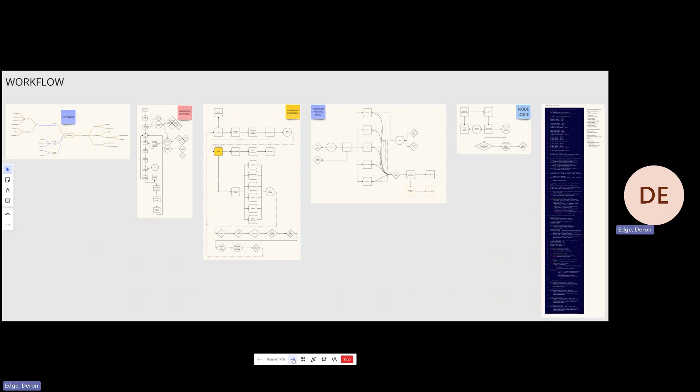So let's go to the first frame. So we've talked about this before. I won't go into it too deeply, but the software is basically a mix of Autodesk products between Revit, Forma, and Dynamo, TestFit, and then there's future options for future software, for example, Arcol or Schema. Both do very similar functions to TestFit, but the main thing about all these is they have the ability to tie into Autodesk and each of these other components. So it makes a comprehensive design solution.

Now, this first workflow is basically just kind of an idea to iterate through the process, right? So for example, you would start with Forma, develop a site plan, specify a parcel that you are going to define the site on. And whenever you know that parcel, you can start doing things like code analysis, or you can run initial site analysis, things like a wind study, building density studies, pedestrian flow studies, noise studies, things along those lines. And that all feeds back into the parcel.

From here, you can export out to Revit, at which point we come into the Dynamo portion of it. So what this will end up doing is exporting out various geometries, lines, for the most part on this first run, that we can start running the script.

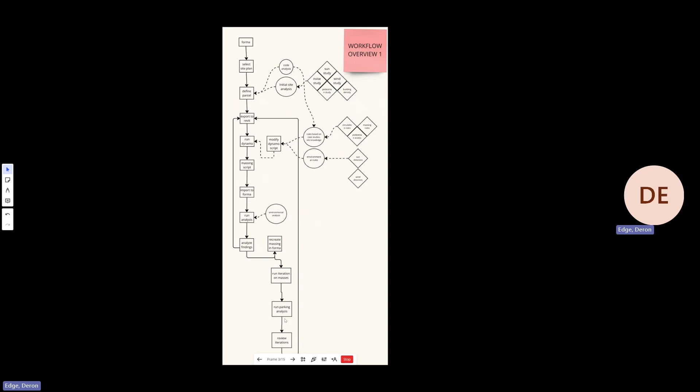Or if there's more adjustments that need to be made, we circle back to Revit. It goes back out as the export, and then we run through the process again and keep refining it in this loop until we get to a solution that we're happy with. This is kind of the workflow of overview one.

The next workflow is very similar. In this case, we're also starting with Forma. So we'll do a site creation, same thing, parcel selection. We'll specify the link to Revit. And then up here at Revit, we'll go back to the Dynamo script. In this case, we're doing something a little bit different.

Inside Revit, there's a generative design command where essentially instead of, in the original one, running one script at a time, this will run that singular script or a multitude of scripts multiple times, kicking back a variety of results, and it'll develop basically a report or feedback that'll let us know, based off of the matrix or the parameters that you're interested in, these are the most efficient ones based off of your design.

At that point, whenever we go through that process and streamline through that, we can go back out to Revit, select the design we're going to go with, and then go back into Forma. Once we're in Forma, we can jump into the analysis of the masses. In this case, the same thing as before. There's the parking stuff, the environmental, the sun analysis, wind, sound. We can start looking at the carbon footprint. And we just keep going back through this process.

But the difference here is this generative design option, which allows us to do more design options up front than the previous overview of the workflow. From here, we'll select the design, and then the same thing goes back into TestFit. The problem here is we'll have to manually build all the masses that we've been developing in TestFit. There's no good way to link it up at the moment.

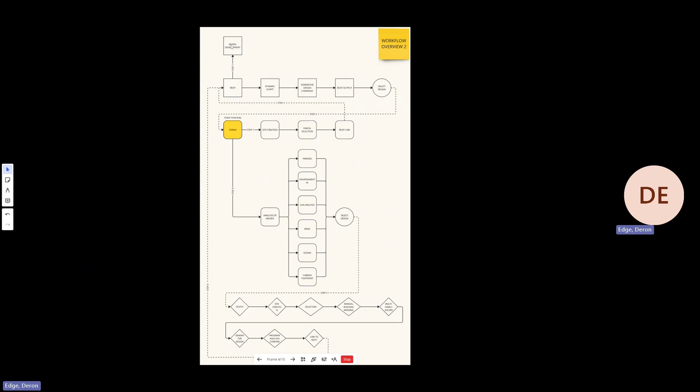TestFit also has a generative design option, similar to what Revit is going to do. So it'll generate multiple outputs based off of various inputs that you give it. Of course, once you go through that, you pick out the one that works best for you. And then from here, you can actually link the TestFit model, which is a more defined physical model, back into Revit. And once we've gone through this process numerous times and gotten to the most efficient design, from here it goes from Revit, and then you start working into the model development.

So, talking about the nodes real quick. We'll just specify these real quick. So this is an example of the node layout inside Dynamo. Now, this is just a matter of packing logic and whatnot, and I'm not going to spend a lot of time talking about these. So basically, the commands are a series of cuboid and bounding box commands that have specifications for length, width, and height. You can also specify number of units.

In this particular case, we're going to have several main blocks between different types of garages, parking, small boxes, and large boxes. A small box could be representative of the multifamily bars. A large box could be representative of the grocery aspect. From this point, these cuboids will have specifications based off length, width, and height, number of units, same thing. But there will be basically tie-ins back to ratios.

So, for example, if there's a height that we can't go over, then the bounding box will not let us develop anything that goes over that height. It'll also not let us input more area on these accumulated boxes than what's necessary. So essentially from that, we'll get a list of boxes, and then we can start packing them into the space in various different ways. And right now, the algorithm is just a random algorithm. I'm just trying to create a solution that gets options in there.

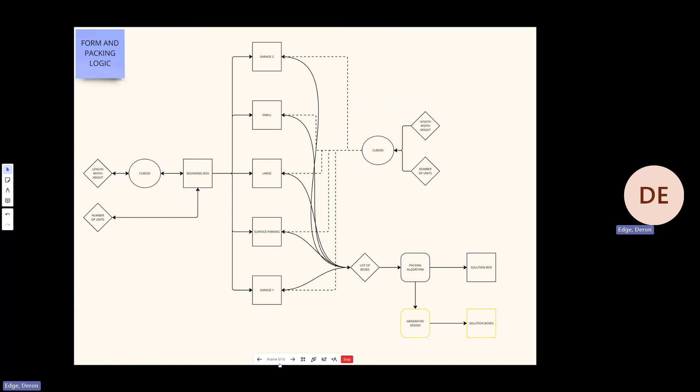As the rules get defined, then it'll be a different case where the packing won't nearly be as random. But this will start developing the solution boxes. And of course, we can go the generative design route, which we were talking about in Overview 2, which will kick out various different options. And then we can pick one to go with the solution box. This is kind of the idea behind the nodes, the logic behind them.

Specify site boundary nodes. You can specify specific types of blocks, specify things like site setbacks for the site, what the FAR might be, specifications for the grocery block or residential block. You can adjust the parameters, and we can add as many parameters in there as we need to adjust these blocks or give it any kind of metadata that might be useful for us.

The placement of the blocks could be anything from developing attractors, right? So attractors could be something along the lines of a pedestrian access point. We definitely want to orient to that. Or if there's a main road, we want to orient, for example, the grocery store towards the main road.

Or if there's a green space or some kind of community amenities or something like that, we want to place the multifamily bars in relationship to. This results in translation of blocks, which essentially creates rotation, height offsets, and orientation on the site.

And then we can also come back with random weighted attractors, where essentially if there are multiple attractors or multiple points of interest to each of these blocks, then we can either randomize the direction that these things rotate or face or offset, or it could be something where pedestrian access is 70% important, while the sun direction is 30%. So we can start putting that kind of math in there.

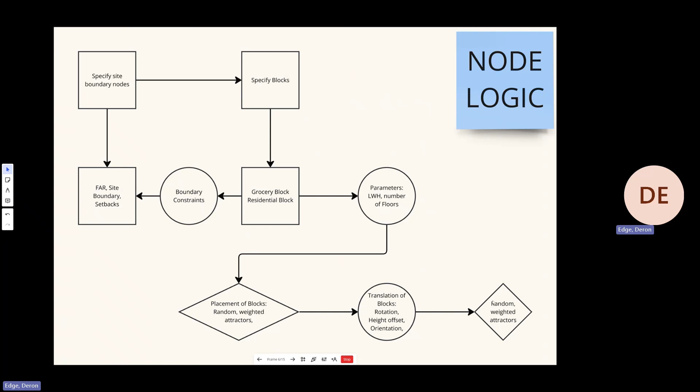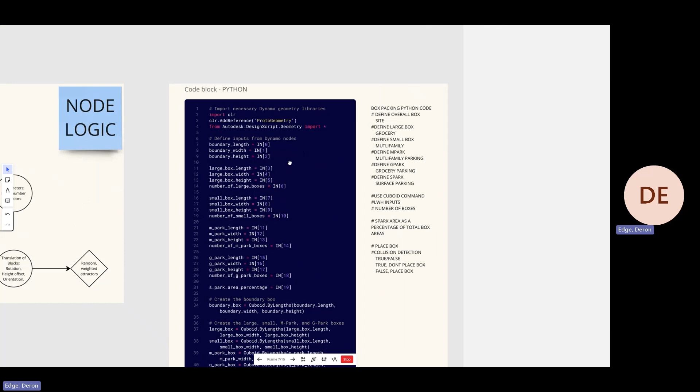This last one is just an example of the interior of the Dynamo nodes themselves. So essentially, this is a code block utilizing Python. I'm not going to go in depth into this, but this is an example of the level of coding that goes into one of these boxes. Now I'm going to stop this now, and we will move on to the demonstration portion.

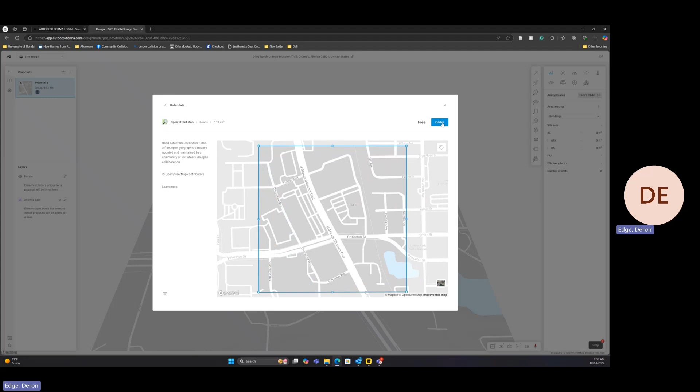Let's go ahead and pull in roads while we're at it. Add, and I want to pull this back over here and grab the full amount of the roads. Just for context, because it's going to be important for noise analysis and understanding the pedestrian walkways. All that looks great. Let's go ahead and exit out of that. Here we are. Let's start by pulling in our information. So let's go ahead and load our information.

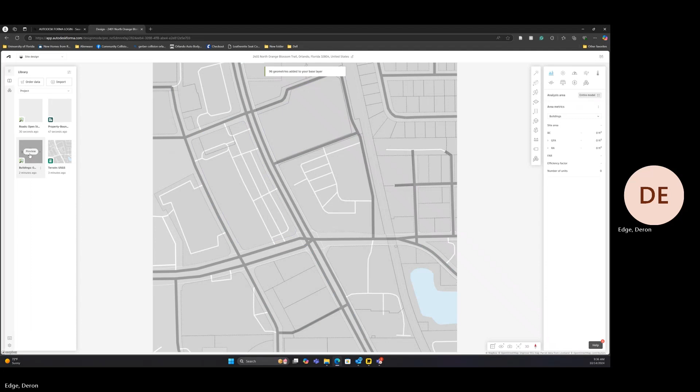So we want to preview the roads. Roads come in. Let's add that geometry. Property boundaries, pull those in. That looks good. Let's add those. Buildings. Looks good. Let's add those. And the terrain is already loaded in, so we don't have to worry about that. Okay, so here's the two sites we were talking about specifically for this. These are the ones that are going to be exported out.

So let's go ahead and create some site elements, the shape and the shape. So these are the two sites that we'll be working with, and we can come back and actually name these sites. Site A, Site B. We can come back after the fact and combine these two sites, but we can deal with that a little bit later. Now there's some existing buildings here from the building information that we pulled, and we're not going to be needing those.

But in the meantime, we have the site information that we're going to pull from. We can just do some quick analysis just from looking at this. I know the main road's here, the main road's here. We can run very simple analysis to begin with. So right off the bat, we'll get some basic area metrics.

So the way this works, oh, exit drawing mode. Okay, sorry about that. So you can do various proposals, proposal 1, proposal 2, and this is what will happen with our iteration. This is where it'll be helpful.

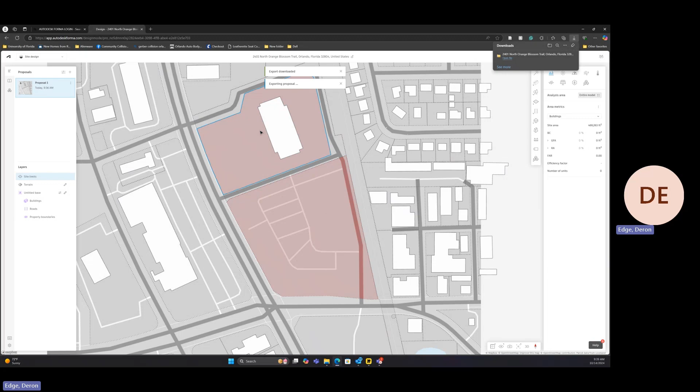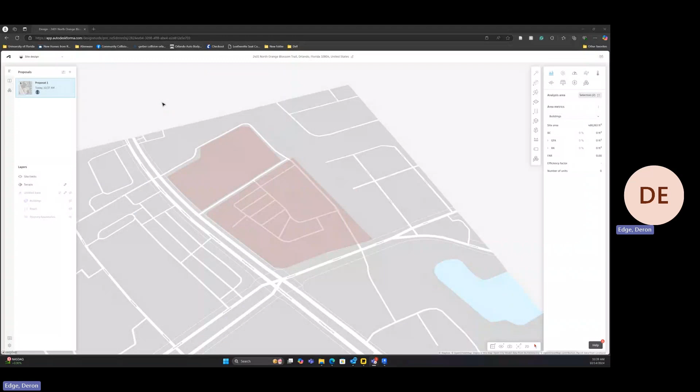Okay, so let's go from Forma to Revit, and then back to Forma. And then Revit will be using Dynamo. So this is the site that we had made earlier. Let's do a quick little something here. Let's just add a basic building real fast. This is just to show the relationship of the geometry.

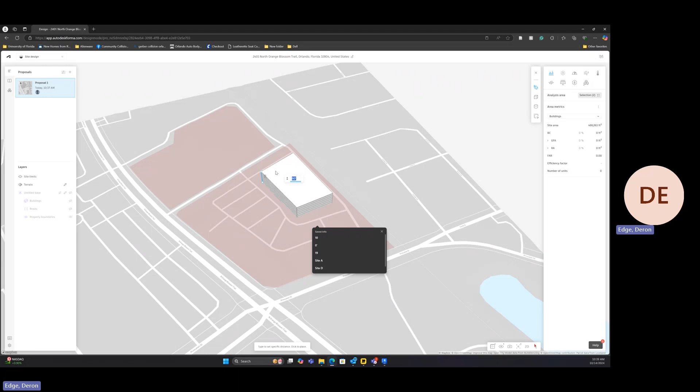And let's just take it up 20 feet. Oops, sorry. Okay. So we got a generic mass in there, and we can come back and modify and do whatever we need to. So just to make this thing stand out, we're going to say it's 30 feet and it's 2 stories. All right. So that's just a massing block. It doesn't really mean anything right now.

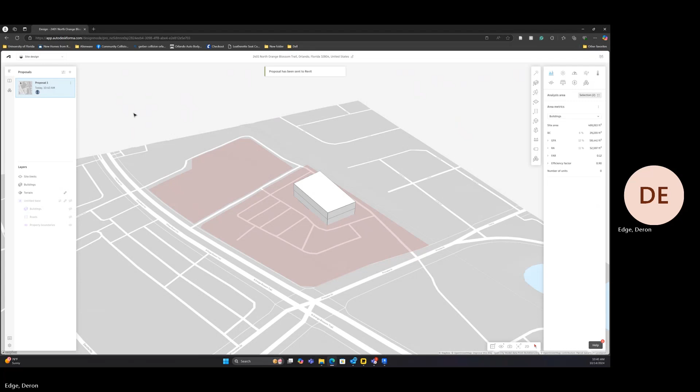So let's go ahead and export this out to Revit. So we're going to go here, Revit, we're going to send to Revit as a link. Proposal has been sent. In this case, we will pull up Revit. So what we're going to do in here is under Massing, there's the Forma add-in. You had to download and install this earlier. We're going to load the proposal.

So you definitely want to check options. Now you can have it based off of the geometry that's in there, create walls, floors, and roofs, and things along those lines. We're not going to have to worry about any of that right now. But what we will have it do is create conceptual masses for 3D sketch elements. Actually, no, we're going to leave it out because we're going to pull in the geometry from Revit.

In context, create lines from the site limits, property boundaries, roads, all that, apply terrain. We're not going to need terrain for this, but if there is a terrain heavy site, you could import that information and be able to cut site sections and things like that to understand it. But really, we're just interested in the context of the site right now. So let's click OK and load the proposal. Looks good. This part usually just takes a moment.

All right, so let's zoom out and see what we actually got. Okay, so it looks like it brought in a lot of the parcel data, brought in our 2 site elements that we're interested in. The model base, that was all the parcels and everything, comes in as a group, and then these guys come in separate. We're going to go ahead and hide this for now because we're not going to need it for what we're doing here. Really all we need are these two pieces right here.

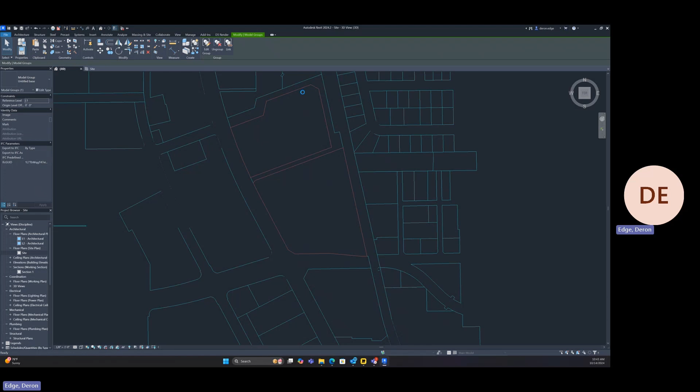Now, it's going to take a second. In the meantime, I had uploaded Dynamo, and I have a custom script sitting in there right now. Essentially, the way the script works is right now it's a random plot generator or random box generator. Basically, you select a boundary, and then based off of that boundary, it places boxes. Right now, it's random boxes, but you can specify the size of the boxes.

So let's focus on this guy first. And let's go to there. And we are going to want Dynamo. Let's go ahead and open up site boundary. Right. That's open. We can come in here. Yes, I just trust it.

You'll want to keep this on manual so this thing doesn't automatically run on you all the time. I'm not going to take the time to go through the entirety of this node. There's a lot here, but really all we need to focus on right now is just selecting the model elements. This will be our boundary.

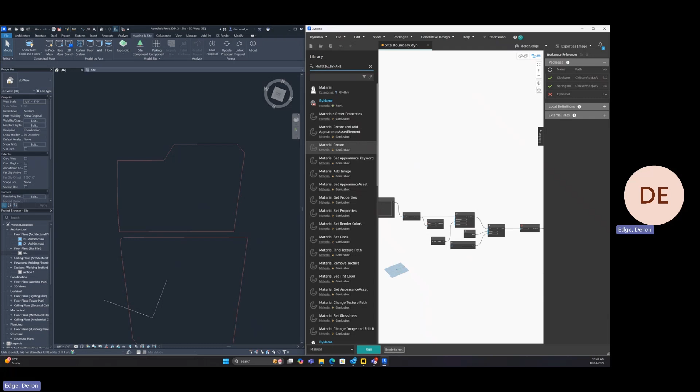Okay, we've got those selected. And I've already got some basic information in there, right? So there is height of the boundary box. I set it at 100 feet. This will be based off of code analysis to determine what the bounding box of this site actually is.

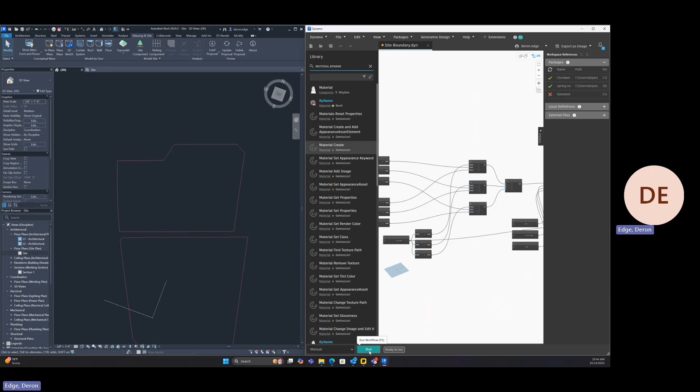And then there's other information that you can put in here relating to essentially the size of the boxes themselves. But I've got a set size in here right now. Let's go ahead and run it. Okay, so it created a box, which is the bounding box of the site.

And then it created a whole series of kind of randomized boxes. Now, these boxes are just 20 foot by 70 foot. So basically, these are just regular little retail bays. But this is just to show the process of making boxes and things in here. Now, the script in a future iteration will start orienting these boxes and changing their different sizes, right?

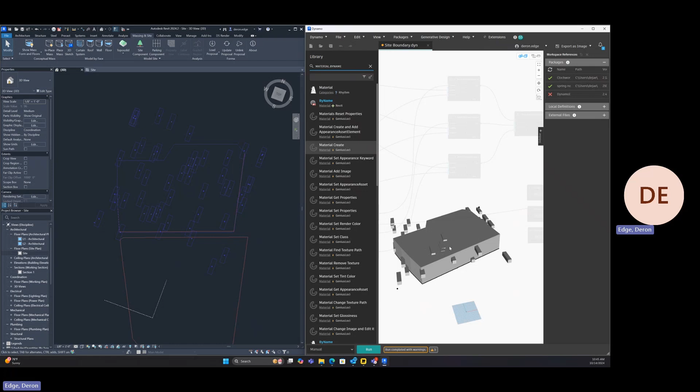So there'll be boxes for the grocery, boxes for the multifamily bars, and boxes for garage parking and surface parking, and possibly boxes for community spaces, parking areas, and things like that. And those things will have attractors associated with them.

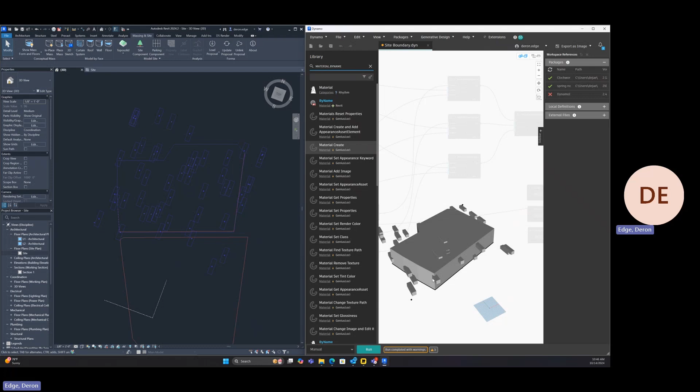So, for example, if the main road is here, you want that to be kind of a forward-facing thing for maybe the grocery store itself. The grocery store would orient itself in this direction. And then the multifamily might stack on top, or it might locate into the back when this one takes priority. So that's all that's going to be worked into the script. But right now, the idea of the script is just to get boxes in there.

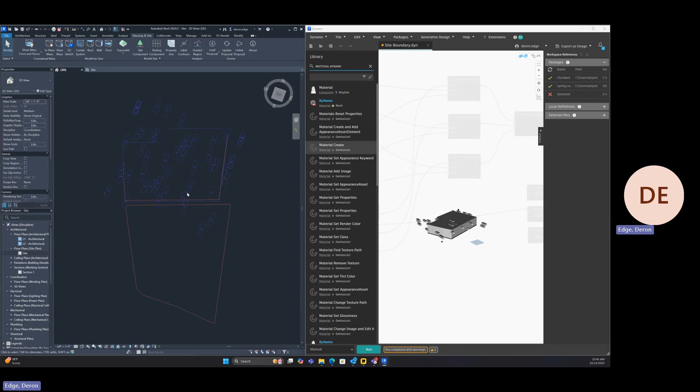So let's go back to Revit. And we can see we've got our boxes in there. Those all came in good. Let's run the other site. I hide those because I do not want those to accidentally get selected. Great. Let's come back and select new elements. You have to get all the elements into a closed loop and run it.

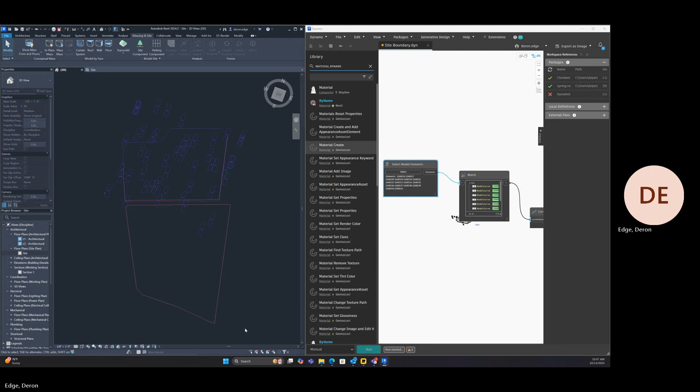It did not select the elements. Okay. Now it's selected those, got rid of these, and it's going to focus on this site now. Run, and you can see it put them in there. In a future iteration of this, as it creates these boxes, it'll drop in actual real geometry. So these will convert to something real. Right now, these are just kind of spatial anomalies. But right now, we've got something that we can work with.

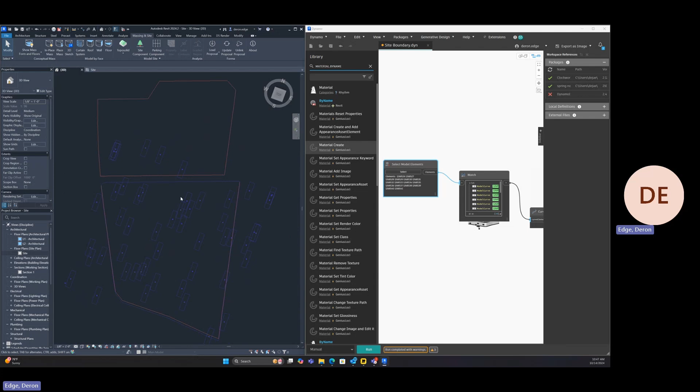Let's go ahead and load this back into Forma. Before we load into Forma, let's do a couple of other things. Say, for example, the script gives you a couple of blocks that you definitely want to utilize, but there's something that you want to modify or put in there yourself. You can always do in-place masses to add to it. So let's put one here, create form. Mass is turned off by default. We will turn that on.

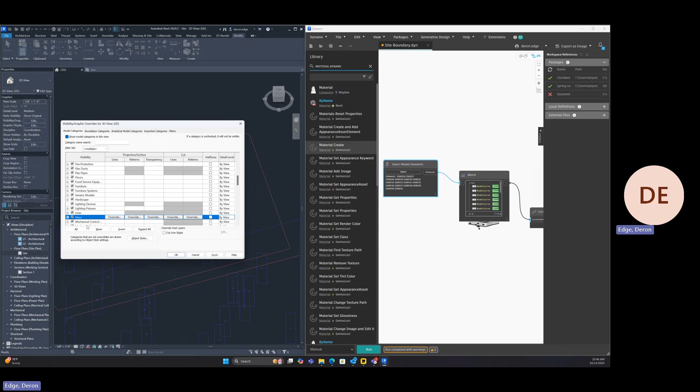Okay. So we've got a series of masses created by Dynamo. We've got one that we've created by hand. Let's go ahead and drop this back into Forma. So we're going to go massing and site, update proposal. We're going to specify the view we want, which is just this view here, and update. A new Forma mesh will be created from one Revit element. Yes.

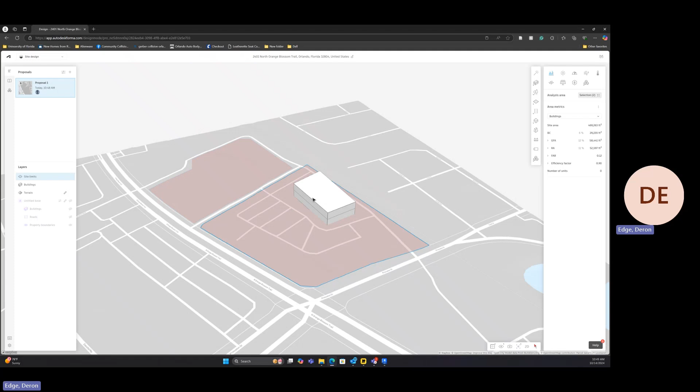Okay, great. Now in Forma, to get it to refresh, you have to actually step out and then step back in. So we are going to step out and then step back in. There. And our masses start to come in. So at this point, I can start running analysis on the designs that we've come back with. Basically, I'll have some initial area metrics that'll start to give basic information.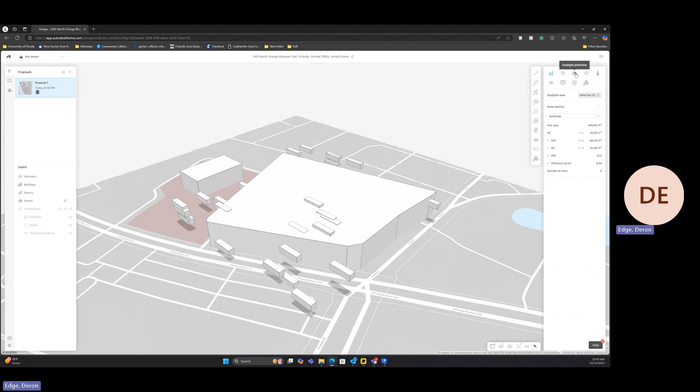I can do sun studies, daylight potential, wind analysis, microclimate studies, noise studies, solar energy usage, carbon footprint, and we have options for additional extensions from various developers that we can add in there as well. So for example, TestFit creates parking. That's an input into here.

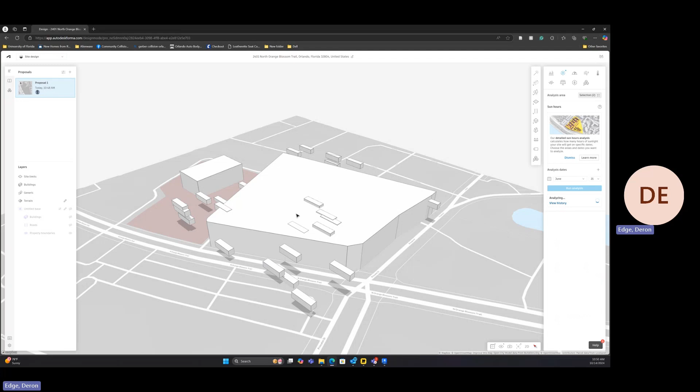In the meantime, let's go ahead and run one of these to see what this would look like going through this process. Now, I'm not going to run each of these. I'm just going to do one or two to show the results that these things produce. While this is running, I will do wind as well. Wind has two ways to do it. There's an initial AI-based wind generative study, and then there's also a detailed analysis that it will run.

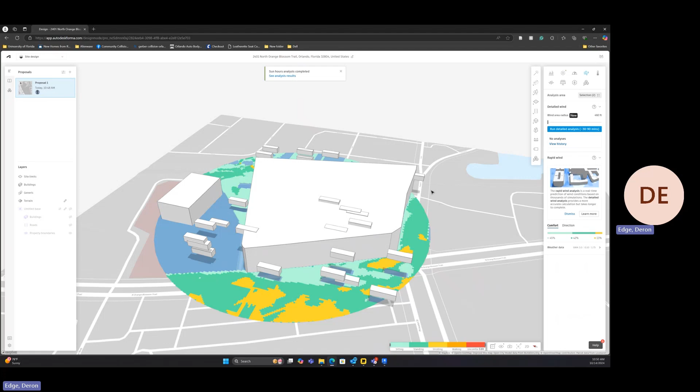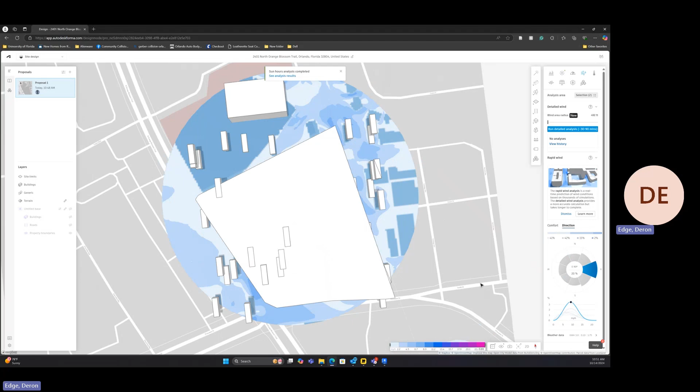But this particular one takes roughly an hour, hour and a half to run. It's very in-depth, very thorough. The AI one is the quicker one. But this starts to give us some basic information, and we can look at the comfort levels and wind direction. So I can start specifying where the main winds are coming from, and start using this for my analysis, like what needs to change in the design. Let's go back to our sun hours and see if that analysis finished.

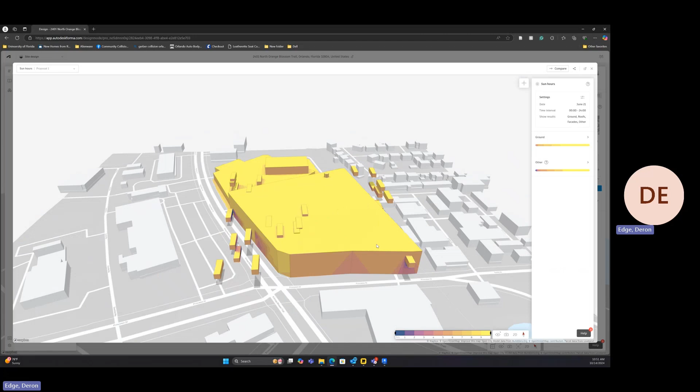So it's coming back and it's telling me these are the areas that get sun exposure. The darker areas are usually in shade for most of the day, and the lighter areas get the most sun exposure all day long. So with a block like this, it's very exposed, but you can start to get an idea of shadow zones that develop, which you could take into account for your sun studies.

Anyway, so this is this portion of Forma to Revit back to Forma. We will stop with this one and move on to the next one, which is TestFit.

Okay, this is the last part. This is the TestFit portion, and that'll be TestFit to Revit.

Now, one thing to keep in mind is right now there is no import of these Dynamo, Revit, Forma geometries into TestFit. So it becomes a case of having to manually recreate the massing to get this information, and a lot of this is about recreating content you've already made, so there's kind of a massive pitfall that hopefully we can get around in future iterations.

But for now, for this demonstration, we're just going to recreate the steps of recreating a site. The massing we've done before has been very generic, so I'm going to be very generic with this one as well. This is just talking about the process. The first thing you have to do is define the parcels. We're going to define this guy today.

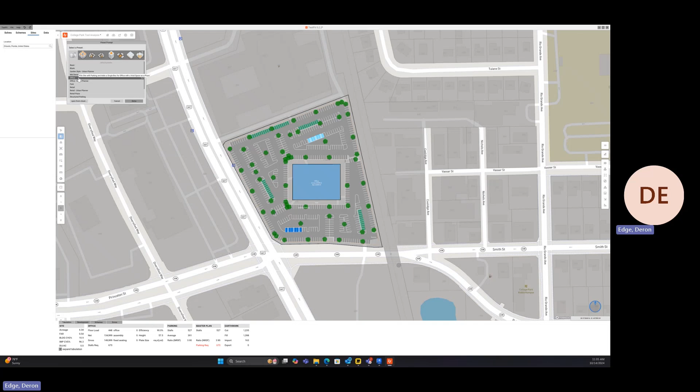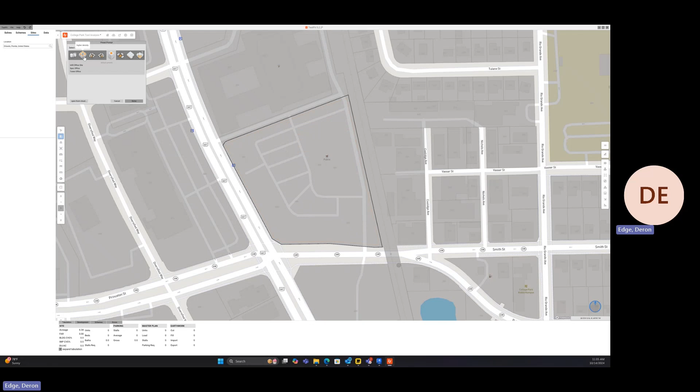There's lots of options here, but for our stock, since we're not starting with anything right now, we're just going to leave it blank because we're going to have to build this. So we're going to go ahead and solve, and it's just going to be a blank mass.

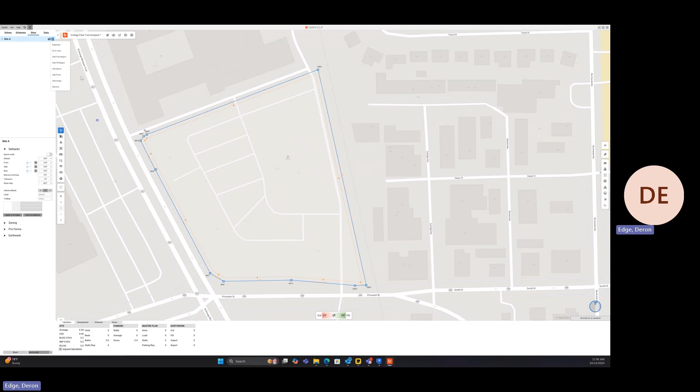From here, what we're going to do is create a series of masses. The idea is that these masses would be based off of what we had created earlier, but since that was randomly generated, we're just going to make a couple of interesting ones here. There's a bunch of ways to approach this, but right now all we're going to do is create a series of masses. This first mass will be a retail base, kind of a grocery mass. We're going to draw an outline. Inside TestFit it's called retail, but we're going to be classifying it as grocery for our use here.

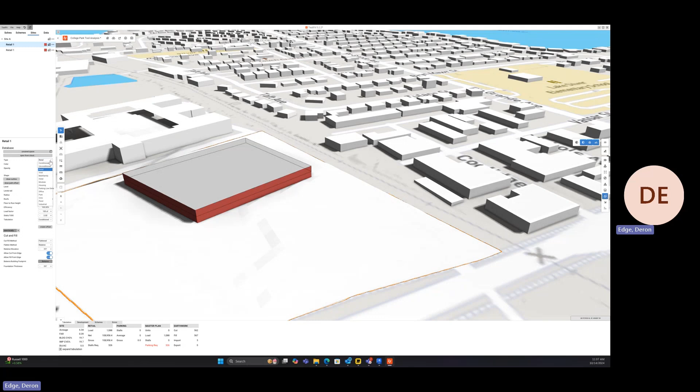So that's that part. Let's add some parking to this. While we're doing this, let's go to 3D so we can really start visualizing this. Let's go to the retail, let's duplicate above, and let's change this retail to parking low detail. So we've got some parking low detail.

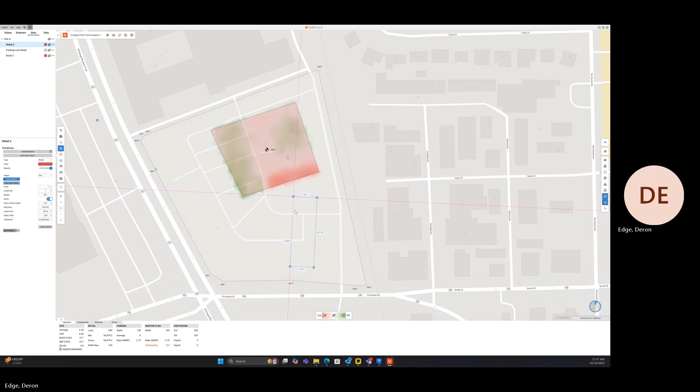Let's add a couple of multifamily bars. So we will create another space, and these are just going to be the bars. So we'll do something like this, and of course you can turn on snaps. And we will change this to multifamily.

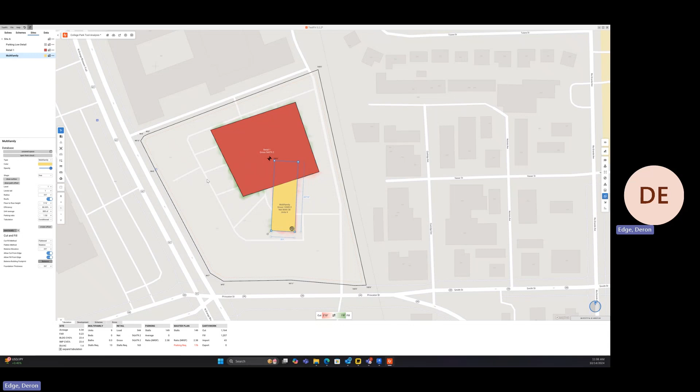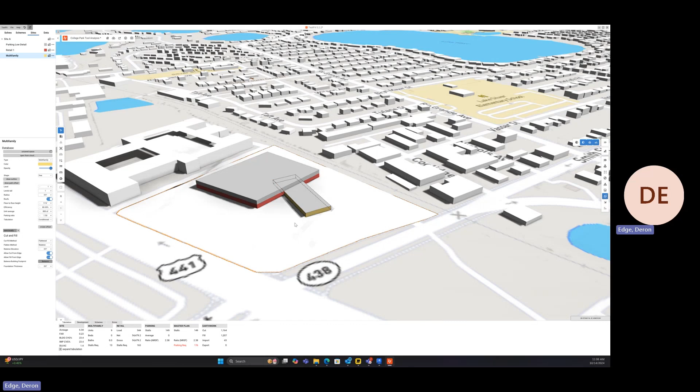Now, the way this thing works is it's based off of a hierarchy system, so the higher up an object is, it'll overtake the objects below it. For example, if I was to move this down, you can see that the grocery store would start to take over. So to see what this looks like here, with multifamily being on the bottom, we will add a couple of levels. We can see that the grocery store and parking garage take precedent up to level 2, and then from level 3 on, the multifamily starts to build out. So that's kind of how that will work.

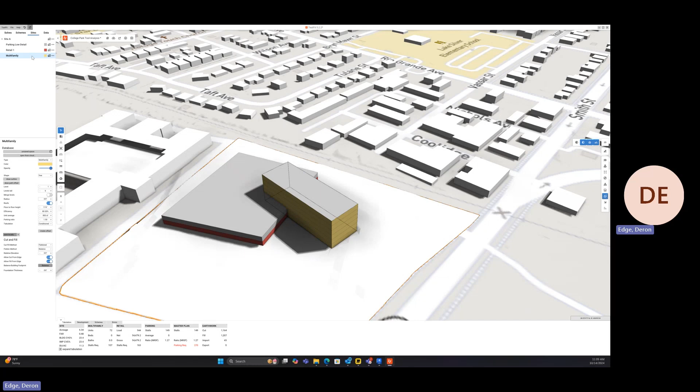From here, we can run a solver on the multifamily. Now, one of the problems with this particular solver, the way it works now, is everything is very vertical based. So in this particular case, with this overlay, it's not going to account for that little notch that has been taken out. What I'd have to do is move multifamily up to here and have it carve out of the parking and grocery, then come back in and manually void that information out. But just for this example, we're not going to go through those steps. We're just going to show the solver in action.

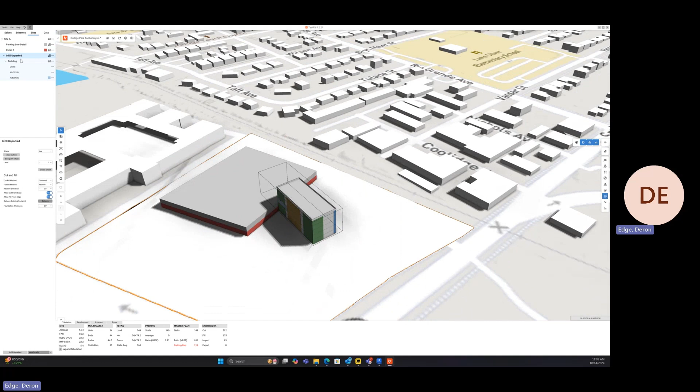Infill unparked. So it creates a multifamily structure. Since we're playing around with this, let's just move this up to show it kind of intersecting and tying into there. Yeah, that'll work.

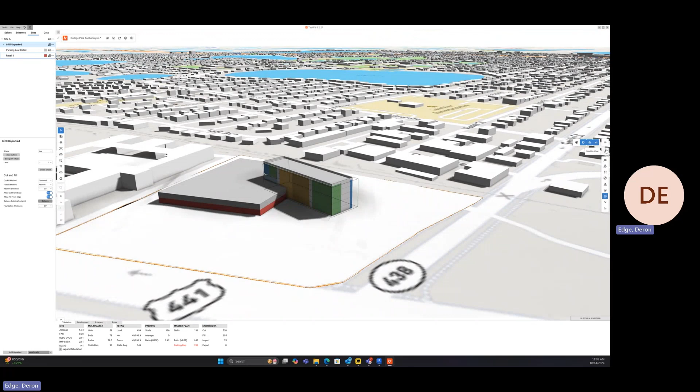Let's go ahead and go to 2D and see what the floor plan looks like. So we get a couple of floor plans, basic units. We can see the relationship of that with the retail, but it's really the grocery store in here, and then its relationship with the parking.

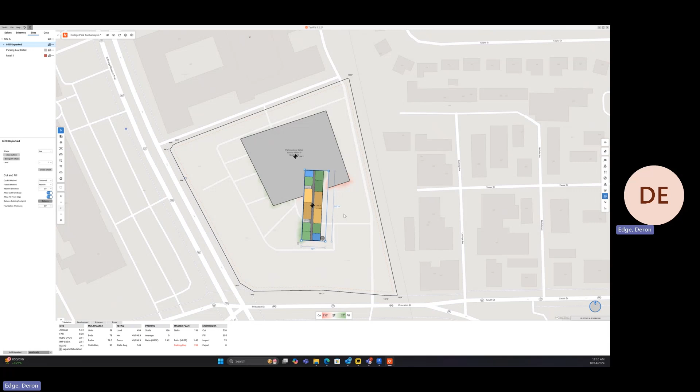So from here, even though there's no import function from these other geometries right now, we can export this content out to Revit. What it does is it's not Revit native, it is SketchUp and DXF. So for our particular case, we are going to export out a SketchUp file. We will go File, Export, do a SketchUp model. This is the demo. Save. Yes.

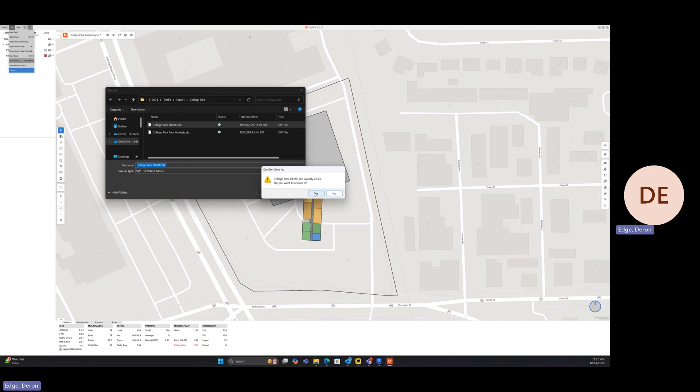That'll take a second to go. All right, so that's a relatively small file. Would have went out. So let's come back here.

So these are our generated Dynamo in kind of Revit. So this is kind of the combination of Forma elements, Dynamo and Revit elements, and now we're going to bring in the TestFit elements. And let's go ahead and bring that in.

Insert, link CAD, College Park demo, open. Now, one thing to keep in mind, this is actually kind of a bothersome thing, is it doesn't always pop up in the same coordinate system.

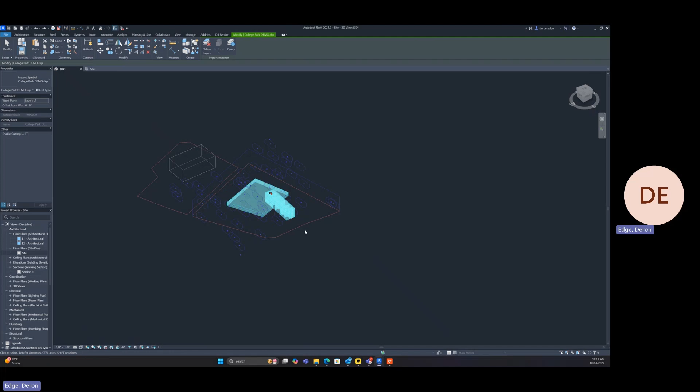The coordinate system always seems to be a little bit off, so you will have to manually kind of put it back into its spot.

But this is a case of going from Forma to Revit, Revit creating Dynamo, Revit also creating masses, trying to recreate some of that content in TestFit and then re-importing it back into Revit. The idea being Revit is the kind of common ground where all these languages kind of come together and speak.

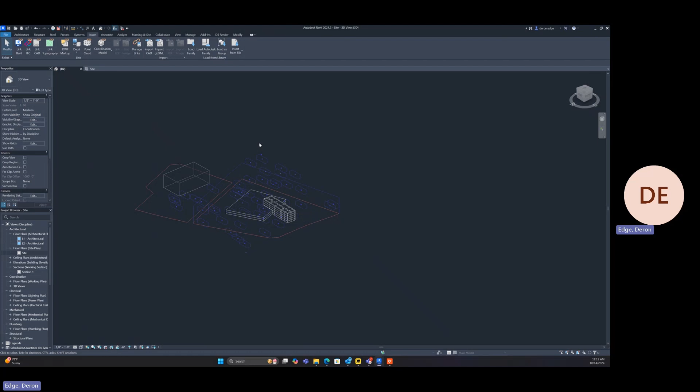So now that we've got this and all these elements kind of pulled and tied in together, let's push this back out to Forma and see what the final results are.

Actually, just so this looks halfway like something, because this is a big box, it kind of covers everything up. I'm going to move this over here like that. And move you over here. You over here. Okay, and let's go ahead and go back to massing and site.

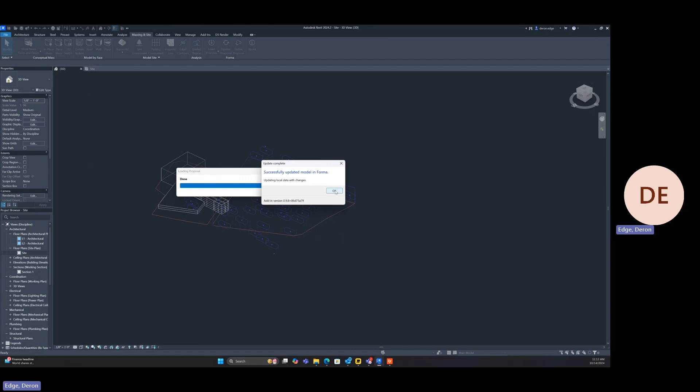Update proposal. Update. Takes a second to go. It's been successfully updated. Cancel. I will come back and save that later.

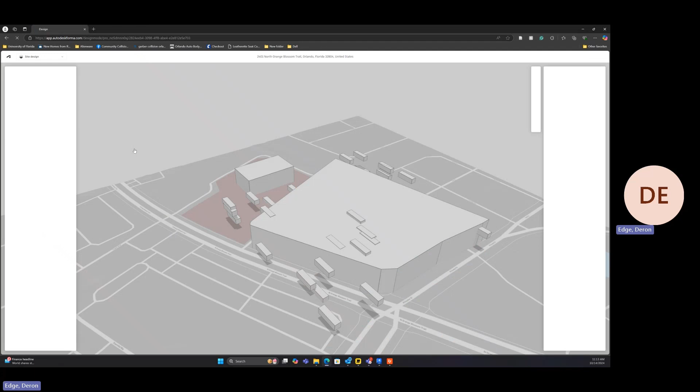And let's go back to Forma. And we have to refresh it. So basically stepping out and stepping back in. Take a second to update.

This is the fun part about a demonstration. It does not look like it brought over the SketchUp elements. So that is something for kind of future study to try and figure out what exactly happened there.

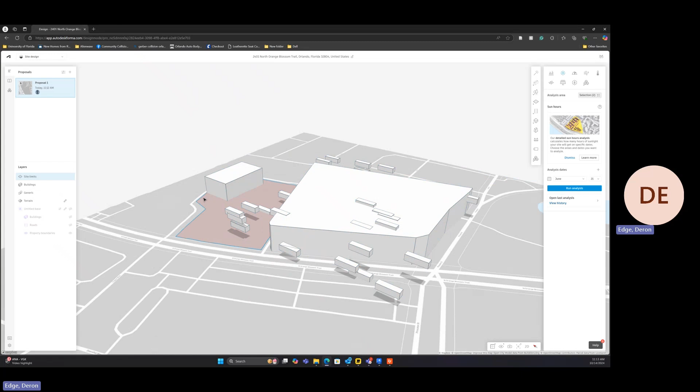But I'm going to go ahead and end this video now. This is basically just a showcasing of the workflow. There's refinement that needs to happen as this is randomly generated. The rules that have been studied and developed and analyzed are going to be incorporated back into the script in next iterations. These won't be so randomly generated, but more intentful and purposeful. Thank you for your time.

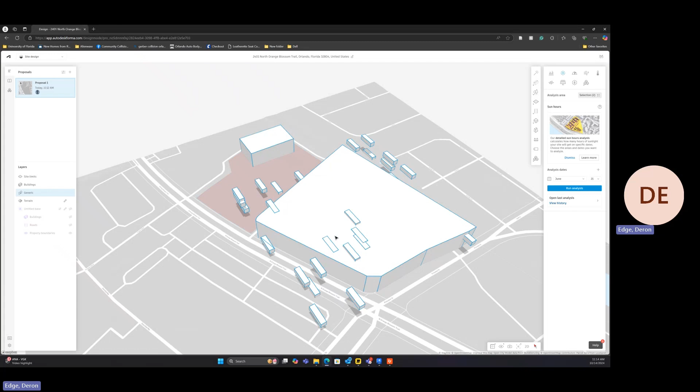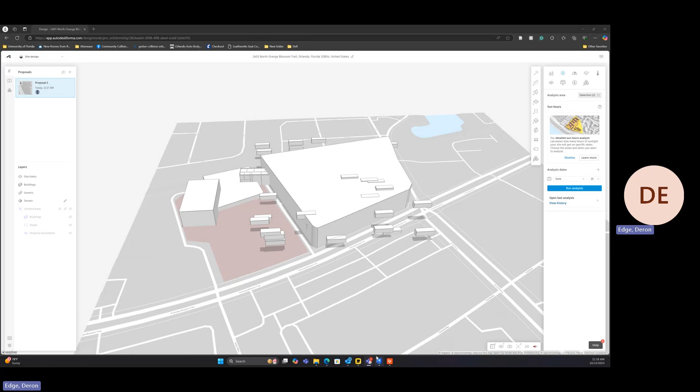And this is the live demo. Okay, I do want to make one additional note. Earlier, whenever I tested this, the TestFit file to Revit didn't come into Forma, and there's a reason behind that.

So essentially, whenever you imported it as a link, manage links, it came in as SketchUp elements, and SketchUp elements were not compatible with going back into Forma from Revit.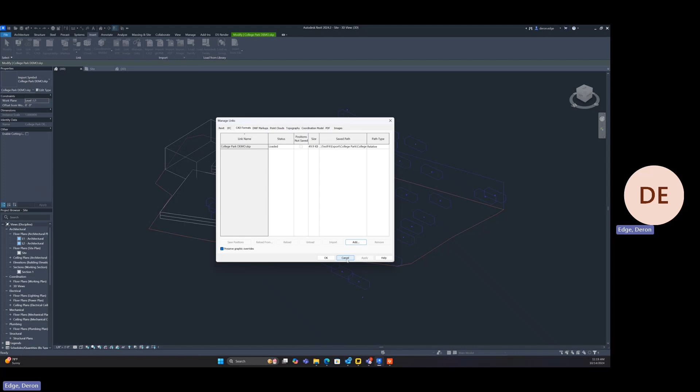What you had to actually do was create a 3D massing family. And inside the 3D massing family, what you did was import and link inside the SketchUp file, at which point this gets loaded back into the Revit site family, which is this character right here.

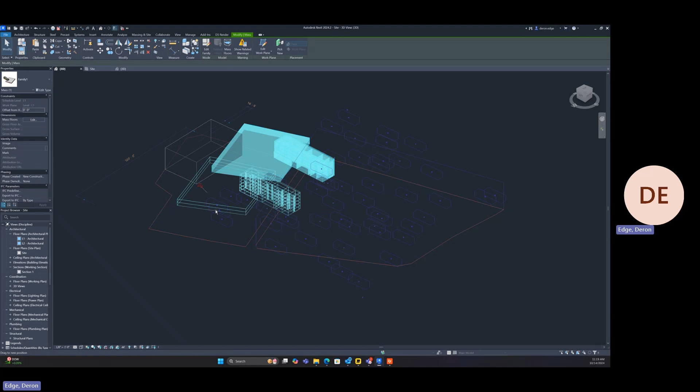For this particular case, I'll delete him and move this guy down into that position. But now this will now go over.

So let's go ahead and, as the test, update the proposal. Update. Yes. Okay, and now we will go back to Forma.

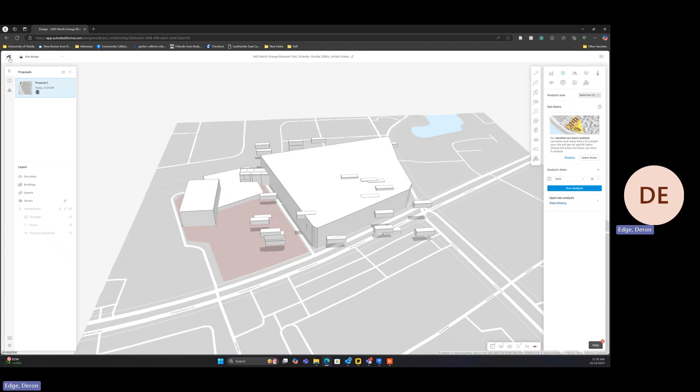We will back up. Go back in for the refresh. And it should appear right here. Yep, there it is. So now that that's here, we can start running our analysis on this new design that's been refined with some of the interior pieces as well.

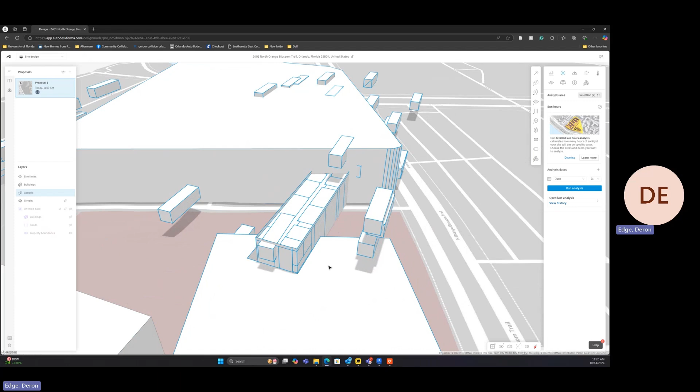So that is the process. I will go ahead and end it here. Thank you for your time with this demo.